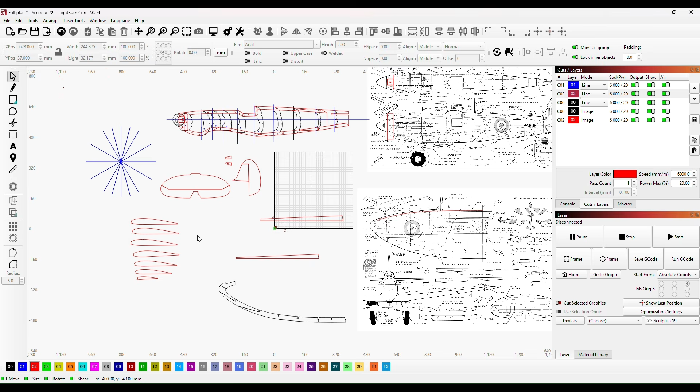So let's get going. To finish everything off, we've got our wing ribs and our wing spars. What we know is this is just the outline of the rib. They need to be cut so that they can fit either side of the spars. Also, with the ones outside of the dihedral area where we've got our plywood strengtheners, I'll notch those. I think I'll notch the spars and notch the ribs rather than cut them into sections.

But the first thing we need to do is position these ribs back on our leading edge that we've got here. I'll press the full stop and that turns us around 90 degrees. I'll bring that one up. Now, where I want this, I want the inside of the bird's mouth to be right on this center line here, but also the bottom of the bird's mouth needs to be level with this leading edge. So I'll close in on that a little by pressing Control and Shift and then using our arrow keys to move us around, and I think that's about the right place.

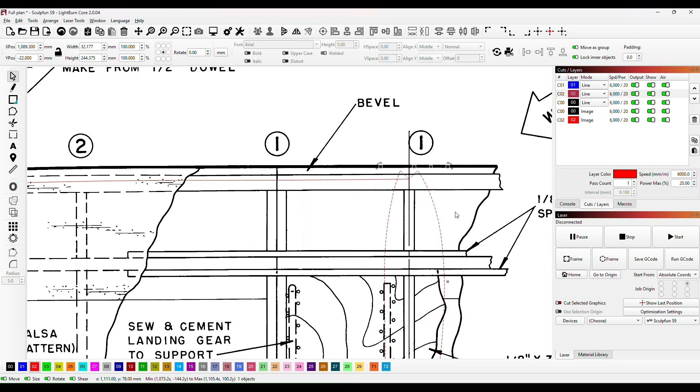Now if I maybe take the last one as well and bring that over, I'll put that into position so that the bird's mouth is just on the leading edge and level with the center of this rib on the plan here, and that looks around about perfect there.

Okay, so what we can do with this now is we can adjust the size of these spars, because remember we copied these straight off the plan, but the original plan has a 1/8 balsa wood cover on everything including the wings, because this was a control line model originally and we're converting that to radio control. So what we need to do is just alter the size of these slightly.

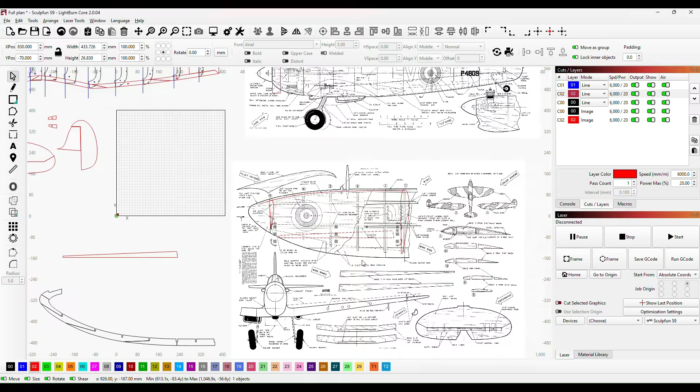So if I just bring that round and then bring the top of that to here, you can see, and I'll just alter the angle of this as well so that we're more or less parallel. You can see that this spar is nowhere near as big or as wide as the rib that it's going to support.

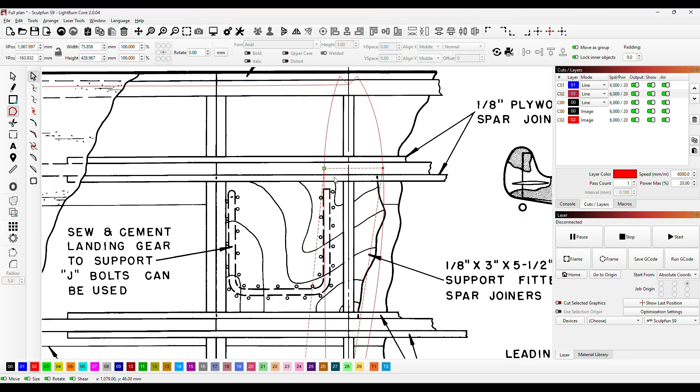So what we'll do is we'll go to nodes, and all I'm going to do is move this node to the center there and move that node to the center there, snap those into place. I now know that the thick end of this spar is going to be the right size for this rib.

So if I then come off there, press my full stop again, flip that round and bring it across to the smallest rib, and then what I can do here...

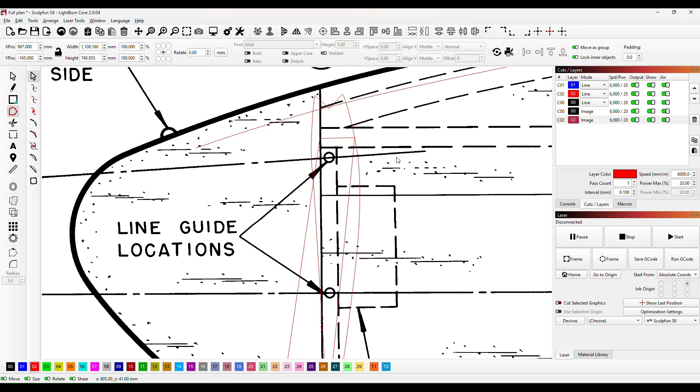is I can go back to nodes. Now I want to be in the center of this - this is the spar. Go back to nodes and I'll just bring that to the center there and bring that to the center there, and I know that spar will be exactly the right size because it'll taper down, as do all of the ribs.

It'll be exactly the right size for that leading spar there, and it will match all of our ribs. So if I just take that out of the way, then what I can do is get the smaller spar.

Just get that level as well. I can bring that in and do exactly the same at the other end. So I'll just drop that down until this is parallel first. Now if I drop that down until it's in the center of this spar here, just like that, and then take it to the center of the rib.

All I need to do is go to nodes and just widen that out a little bit. So come off nodes, flip it round, and then take it to the other end.

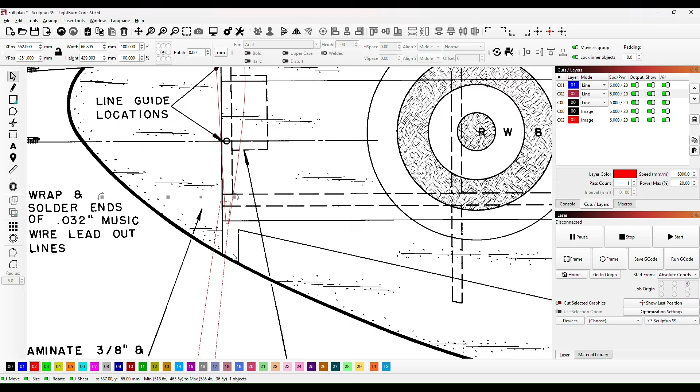What I'm finding here is, if I get to the center of that spar, we're actually not a million miles away. We're not very straight there, to be fair. But I think what we'll do is we'll just bring that in. We'll bring that in, and now I know that our spars are exactly the right size.

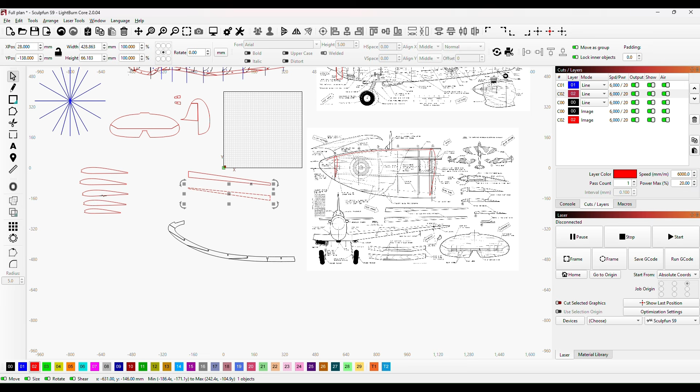So that was the first thing that I wanted to do. Next, I want to arrange the remaining ribs out. I won't put these two on, because these are both identical to rib number 1 there. So I'll just bring rib number 2 and put that in place.

Let's bring that over. Make sure that it's right in the center of this rib here, and I want the bottom of the bird's mouth to be just on our leading edge, our little simulated leading edge, the red line there. There we go, and that is absolutely perfect.

So if I bring over number 3 and do exactly the same, and then number 4, exactly the same. I'll just line those up now. There, perfect. And there we go, perfect with that as well.

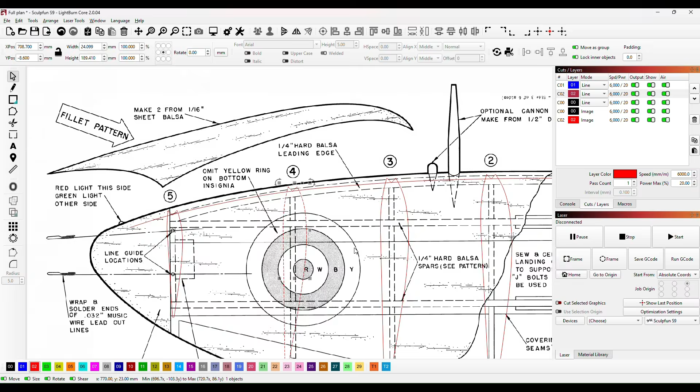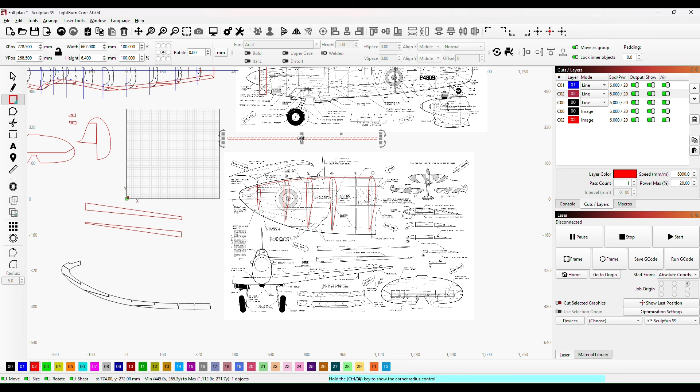Now what I'm going to do is make a rectangle, and I'm going to make this the length of the wing. Now the balsa we're going to use is 6.4 millimeters wide, so if I make the height of this 6.4 millimeters, what I can do is bring that down now and put that exactly where that spar is going to be.

Now what we notice here is that the wing's orientation on the plan isn't quite level, because we're absolutely bang on the middle at this end of the spar, but when we come to this end we've drifted, so we're going to have to just adjust this slightly, just like that, and then if we drop that down, there we go. I think we are very, very close there.

So what I'm going to do is copy that, and then paste another one down here for this bottom spar. The reason I've done that is because I'm assuming that this bottom spar is going to be at the same angle. I think that's very, very close.

Okay, so what we've got now is the two spars in place, and all of our ribs in place. So if I press Control and select each of these one at a time, I'll take the leading edge with us as well, I think. Now if I bring those over.

We're now in a position to start cutting the ribs, because we've got our spars in place, so we can actually cut this rib now into sections, and we will know that it will fit around the spars.

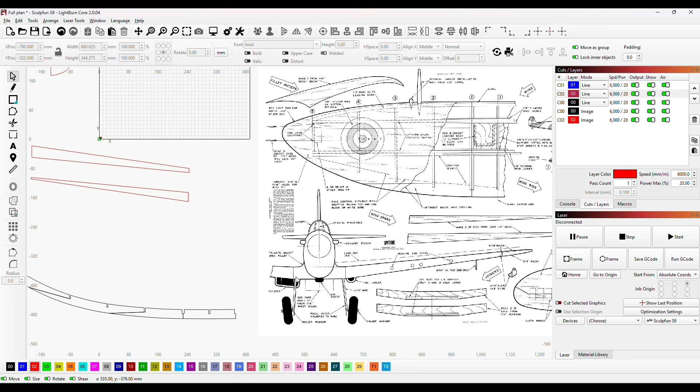Now the one thing that we do know is that at this end we've got our strengthening piece here, the ply, and that's going to go through all of the number one formers. It goes through this number one former right at the centre, and then through these two number one formers where the spar begins, because this is the central part of the wing, and our spar will start here and then come up.

Okay, so let's just have a look at what we need to do with those. The first thing that springs to mind is if we just look at the structure of this wing, this is quite a big wing. If we were to get our measuring tool and look at where the wingtip's going to be, which will be about here, and then look to where the centre will be, which is just where that rib is there.

If we just look at how far that is, it's 560, which means this wing is going to be over 1 metre wingspan.

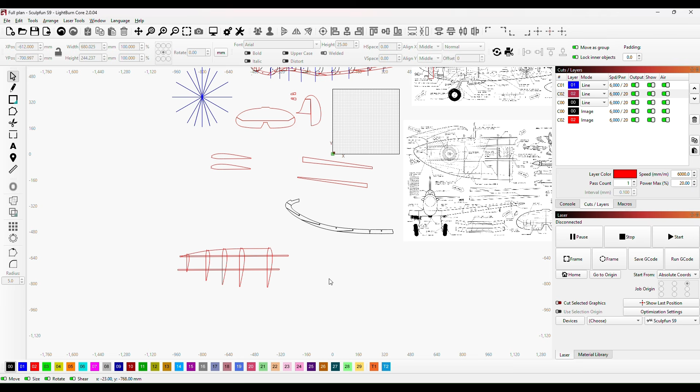So when I look at this, I notice that we haven't got many ribs in there, and you can understand that because the original aeroplane, being control line, was covered in 1/8 sheet balsa, which we're not going to do. So I think what we need to do is, in between all of these ribs on the main plan, insert or create a new rib, because we're going to be covered with covering film.

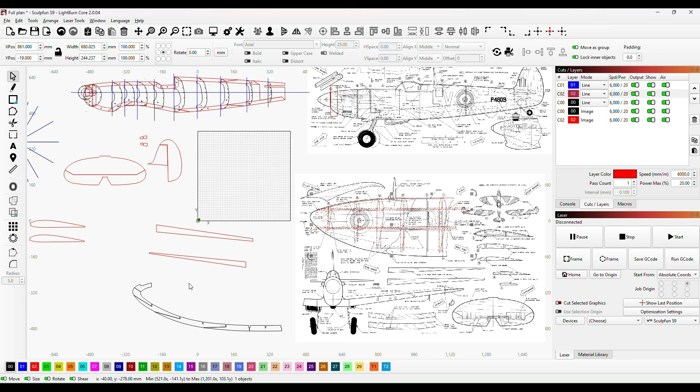With that in mind, I'm going to group this so I can manoeuvre it about without it losing its orientation, and bring that across and place it back on. What we're going to do now is make new ribs and put them in between these ribs, then bring our trailing edge over as one piece and connect that up, then cut new slots in for the new ribs. I think we'll be in a much better position to make a sturdy, strong wing with our Oratex covering for the conversion to radio control.

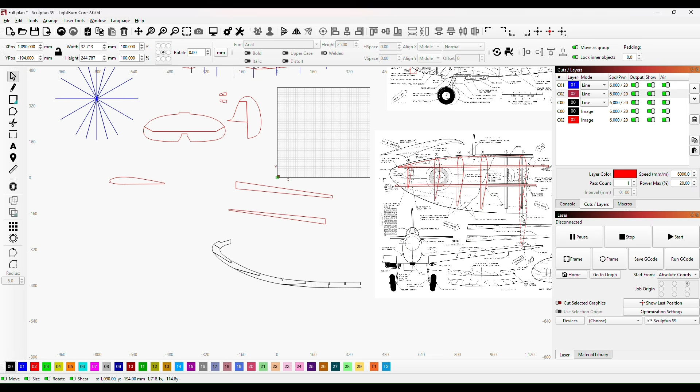So I'll take one of these other ribs from over here, rotate that, bring it over and orientate it with this end rib to make sure that it is perfectly upright.

If I just move across, I think we'll find that's about where we want it to be. So this is the central rib, which will be right in the centre of the fuselage, and this will all be covered with 1/16 sheet, because that's the bit that's going to fasten to the bottom of the aircraft. But then from this rib here, we're then only going to be covered with Oratex covering.

So from this rib here, I think we need to start making our new ribs to come in between. All I'm going to do is make sure that we've got the tips of our current ribs, and make sure I've got a line joining those so I know how long the new ribs have to be. The way I'll do that is...

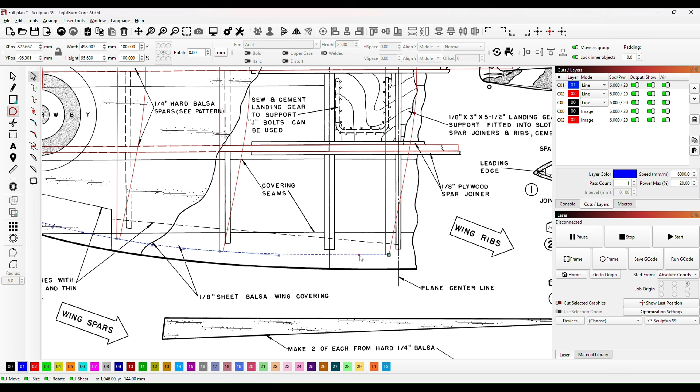We'll probably do this in blue, I think. All I'm going to do is go from that to there, to there, to there, and to there. Then if I go to nodes and just convert those to smooth curve nodes, that gives us a line to work to now, to know how long our new ribs that we're creating in between have to be.

So what I want to do now is, between this rib and this rib—and I'm using the ribs on the plan, not the proper ribs that we've made—all I want to do is measure that distance. So that distance from the edge of that rib to the edge of that rib is 102 millimeters. So I want to come 51 millimeters from the edge of this rib and place another rib there.

So all I'm going to do is make a rectangle, and that rectangle will be 51 millimeters wide. Then when I place that right on the edge of that rib there, you can see that edge there. I know that the edge of our new rib will need to be right there on the edge of that.

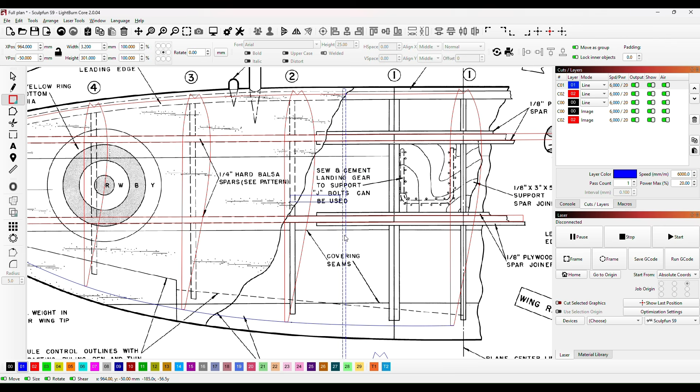So all I'm going to do is make a new rectangle, and I'm going to make that 3.2 millimeters wide, and I can now bring that and place it just on the edge of that shape there. I know that that new shape there is in the right place for our new rib.

Okay, so if I just copy, I'll put another one there for now, another one there, and another one there. But I do need to measure each of these, because it looks to me like each one's a little wider than the one before, the gaps between the original ribs. So all I'll do is measure.

So that's that rib. I'll measure between this rib here, or the bottom of that rib, or the edge of that rib, to this one, and that is 103 millimeters. So I think I'm quite comfortable with that will be 51.5 or 51 3/4.

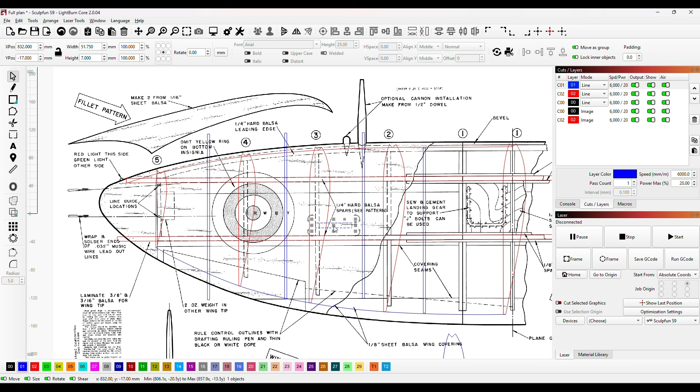So if I just grab this shape and I make that 51.75, 3/4 of a millimeter difference, and I can bring that across and place that exactly on that line there, measured. Then I can bring our next rib across and just snap it onto the end of that there.

There you go. And I know now that that is in exactly the right place, so if I just bring that up to there, drop the top down to where the bird's mouth has to go to.

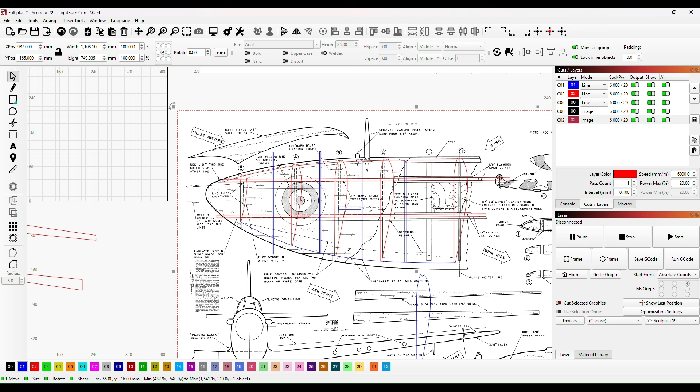I can then do the same process again on these last two ribs. I'll quickly do that and show you what that looks like with all our new ribs placed in the middle there, with the blue ones. I'll show you that in just one second.

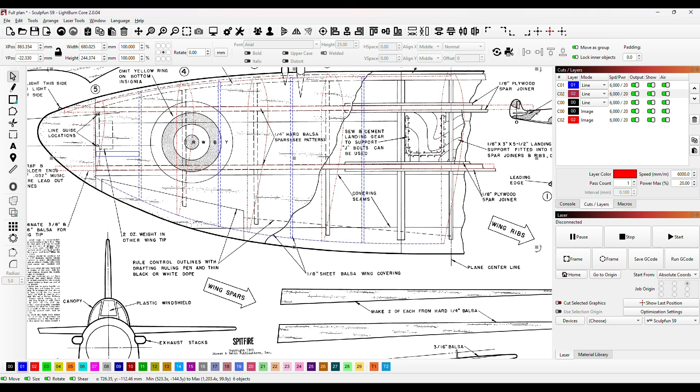Okay, so that's them all placed. Now what I'm going to do is collect our original piece, which was grouped, remember. I'm going to then also press Control, and pick up each of our new shapes for where our new ribs are going to be, and this trailing edge, and then bring the lot

across, and I've now got our new rib there. But what I'll do - I'll worry about that rib in just a minute, because the first thing that I need to do... In fact, no, I can make those ribs now.

So one rib will go right on the center of this one. So the bird's mouth will go right into the center - that's where the bird's mouth will sit. And then if I just bring this across now, so that I can line this bottom up with the bottom of the rib, we'll be able to set the height properly.

So all I need to do now is bring that rib up, and that is our number, and we'll call that 1A, because this is going to be rib number 1, and there'll be 2 number 1 ribs in the middle here where the dihedral is.

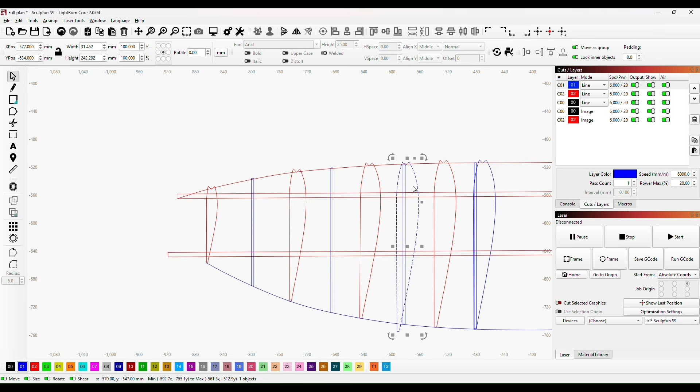So I'll just make a copy of that - a control C, control V - and then what I need to do is line up the bird's mouth with the red line right in the center of where the rib is going to be. Just there. And then what I'm going to do with this one is to bring it into shape, into the right size. I've just got to bring it across so it's level with the edge of that rib.

Now we're going to use the corner to bring this in now, because we want it to shrink proportionally. We want it to get thinner as well as shorter. Okay, so we'll then control copy that and produce another one here.

Okay, and we'll just keep doing that now until we've got all our ribs made up, and what that will do is give us more ribs for the wing, so that we've got a little bit more structure there, a little bit more substance. I'll show you what that looks like in just a minute. So that's all our ribs done.

What we need to do now is cut the notches into our trailing edge. So I've just temporarily grouped our trailing edge, and what I'm going to do is drop that straight onto the plan.

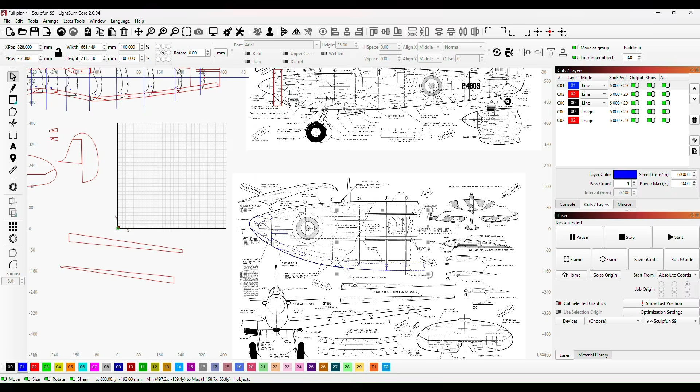And then what I'm going to do now is grab our line for where the slots are going to be in the trailing edge, and I'm also going to grab each of our ribs that will form part of our new plan shape. And if I just group those temporarily again, what I can do is bring those over and we can sit those on. All I'm doing is positioning them onto the trailing edge at the moment, so they would sit just like that.

Okay, now I need to drop this down so that the trailing edge is level with our original rib slots, and we can see that the front edge is now in the right place, because this edge here will be touching the rib.

So with those all lined up, what I need to do is press Control and make sure I've got both parts - the trailing edge, which is grouped, and all of the new ribs, which are grouped. I can bring those across, and now I'm in a position to ungroup those - ungroup that part, and now ungroup this part.

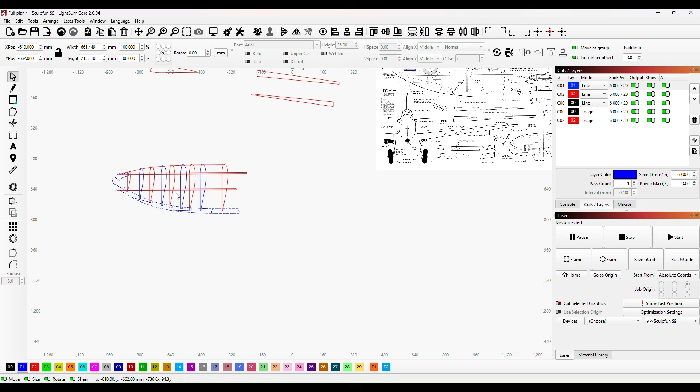I think that will give us a much stronger, firmer, and better rib wing to cover for our Oracover. Bear in mind there's another two ribs to go in here where the dihedral is, but they're copies of rib number one here.

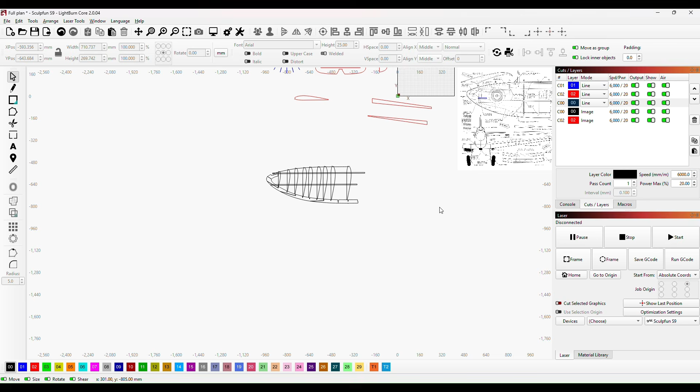Okay, so I think we can now change those and start thinking about making those into proper ribs ready to cut out. So that's all our ribs done.

What we need to do now is cut the notches into our trailing edge. So I've just temporarily grouped our trailing edge, and I'm going to drop that straight onto the plan. I'll just change the colour there, I'll change that to blue, and we'll move that into place.

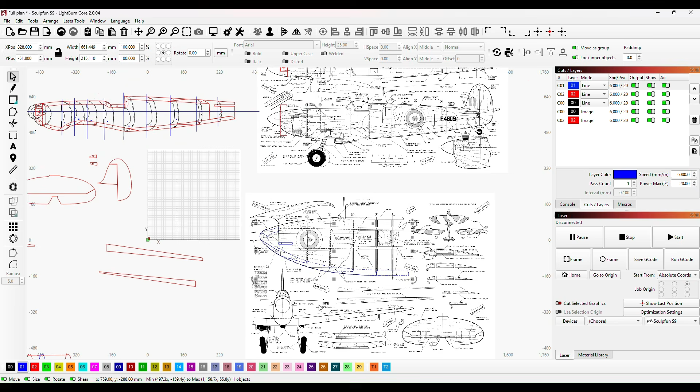That's just in place. Then what I'm going to do now is grab our line for where the slots are going in the trailing edge, and also grab each of our ribs that will form part of our new plan shape. If I just group those temporarily again, I can bring those over and sit those on - positioning them onto the trailing edge at the moment, so they would sit just like that.

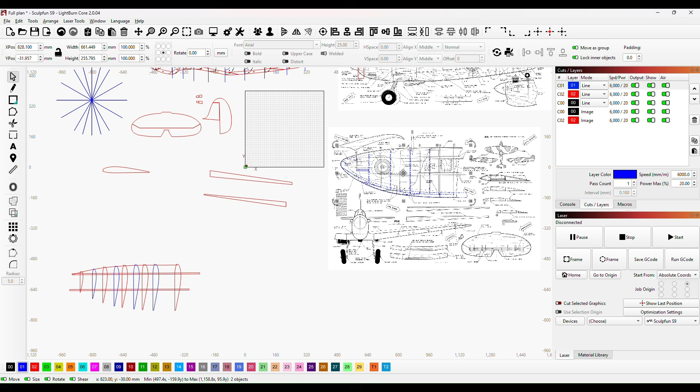So with those all lined up, what I need to do then is press Control and make sure I've got both parts - the trailing edge, which is grouped, and all of the new ribs, which are grouped. I can bring those across, and now I'm in a position to ungroup those - ungroup that part, and now ungroup this part.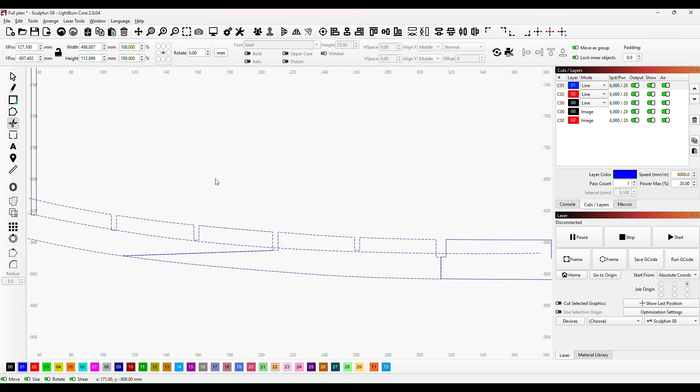What I can do now is use our snipping tool, and I can just cut away all of the bits that we don't want, and what I'll be left with is new slots in our trailing edge that will allow us to put our new ribs straight into that trailing edge.

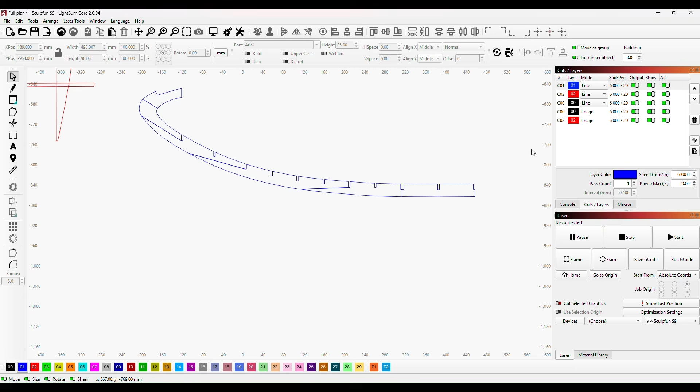So having done that, what we can do now is remove this guideline, because that was just a guide. Delete. So we've now got our new trailing edge, which will now accommodate all of our new ribs as well.

Okay, so I think we can now change those and start thinking about making those into ribs ready to cut out.

So the next thing to look at, I think, is we need to produce these shapes for the dihedral. Now these are going to be made out of 3mm ply, and you can see that this one at the front is slightly deeper than that one - so this is the front of the wing and that's the back of the wing. So all I'm going to do to produce these is use the line tool and very quickly go around the outside, then we'll tidy that up with nodes in just a second.

Now these also have a slot in them, as you can see just here - that slot is for another piece of ply to go in, which will hold the undercarriage. The undercarriage will then be fastened onto that. So what I'll do is produce both of these plywood shapes here, and then also produce a piece of ply to go across inside, and I will put small holes in that so that we can bind the wire undercarriage to the piece of ply that goes in between.

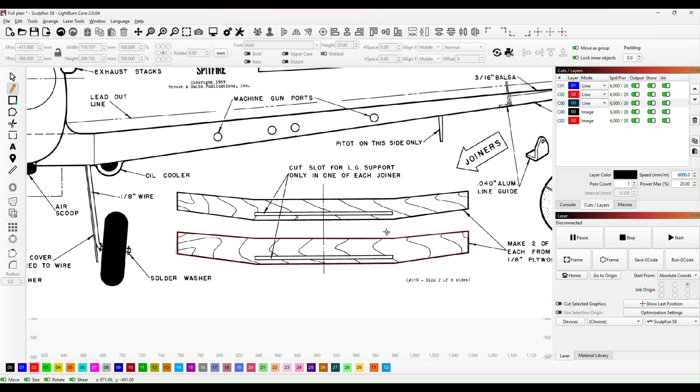I'll show you how that looks in just a minute, but let's finish off these two shapes first. You can see I've just roughly put those in place. We'll go to nodes, and all I'm going to do with each of these is keep them as corner nodes because we want nice sharp edges.

Just get that right onto the corner there, and the same with this one. You can't quite see the node there, just the red dotted line, but if you scoop a shape around it, you'll pick up that node, and once you've got it, you can move it right into place on the outside edge of that shape.

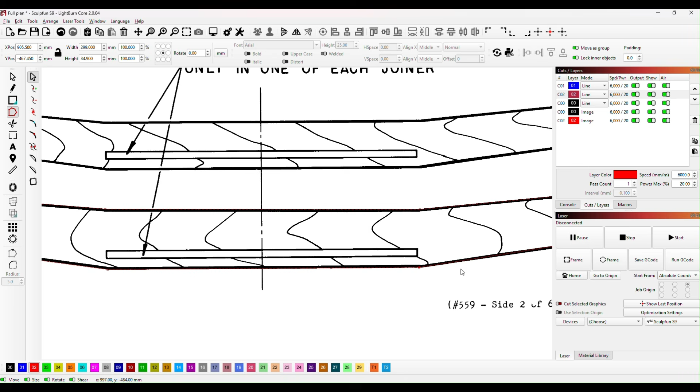So if we move along, I'll be able to pick this one up and do exactly the same with that. What I'm going to do with these in a minute is copy them and flip one, just to make sure they are perfectly symmetrical. I'll show you what I mean in just a second when we do that.

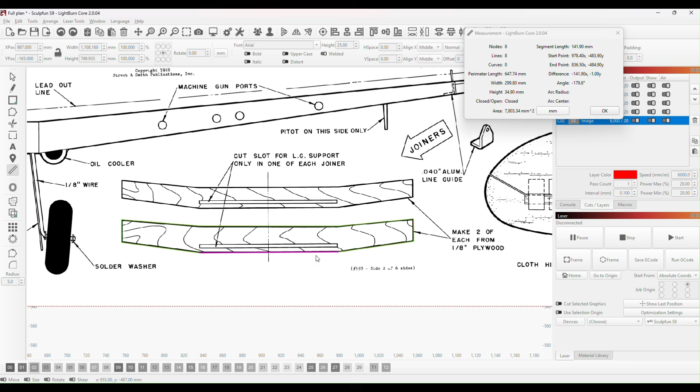So that's the first one, and what we'll do is put these slots in just a minute. If we measure that, the slot is about 5.15 millimeters from the bottom, so we'll make that around 5 millimeters, and we'll work out what to do with that shortly. So that's one shape done.

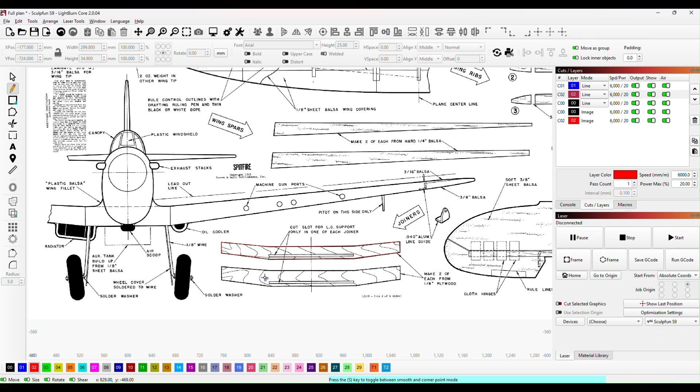Let's bring that across, and I'll just put it under there. Let's quickly do the other shape, and then we can think about finishing those off. Oops, that was miles out. So I'll just correct this one first.

We'll go to nodes, and there you go, I'll just bring that node down. I missed that point by a mile. Never mind, let's just...

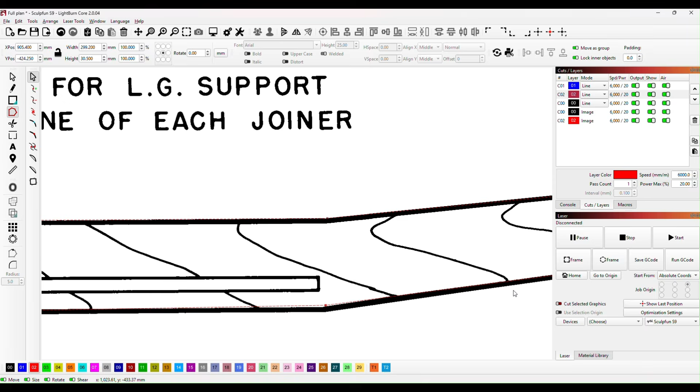I just want that dotted line to follow the outside edge of our black line there, because the thing to bear in mind is that when we use the laser, it will actually cut out that line as well, albeit a very, very fine cut. Okay, so that's our two shapes.

Let's bring this one back over to where the other is. Let's just check these for symmetry. If I Control C to copy, then Control V to paste, I can flip that one and check that they are symmetrical. We can see the orientation on the plan isn't quite level, but that looks good to me. I'm happy with the symmetry there.

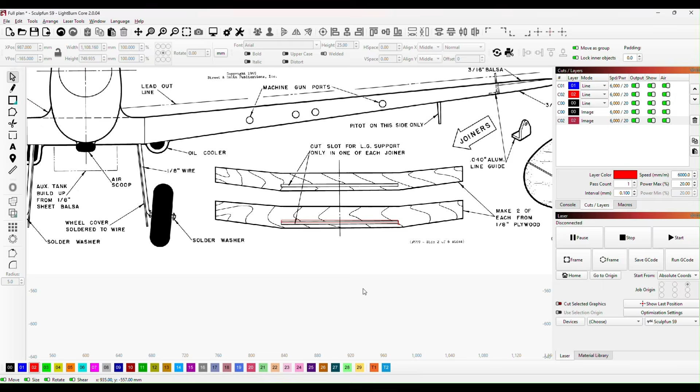Next, we want to produce our slot for our platform to hold the wheels. So we'll create a rectangle and make it the same length as that. Our plywood is going to be 3mm, so all we do is take that shape, make it 3mm high, just like that, and we know that slot will be the perfect size when we drop it into our formers.

All I want to do with this is, if I grab both of those, I can center them just by pressing this button here. The other way to center is if you take hold of this, can you see it snap to the center there? That's snapped to exactly the center of this shape. So if I copy with Control V and put the next one there, that snaps to the center too.

Okay, so all we need to do then is lower those down until they are 5mm from the bottom. The way I'll do that is I'll create a small block and make that 5mm high. Then I drop that into the center there, and if I zoom in, I can just drag that down and snap it to the line below.

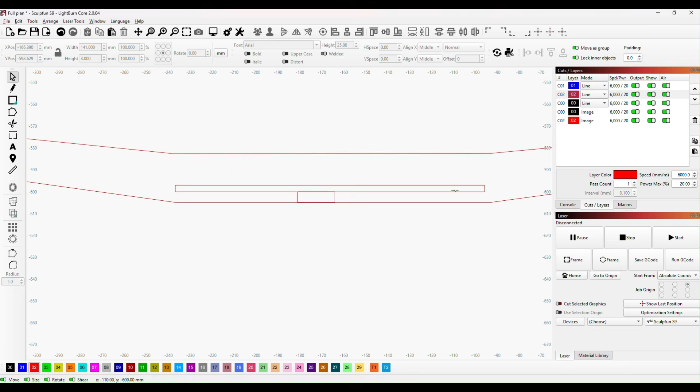Then if I bring this down using our keys so that it stays in the center, I can set that at exactly 5mm. So I now know that's 5mm off the bottom of that shape, and it's right in the center. I'll move my little measure down again, zoom in, grab that bottom line and bring it down till it snaps into place. Using Control, I'll drop down 1mm at a time until I get close, then Control and Shift to move 1/10 of a millimeter at a time until I'm 5mm off the bottom there.

Okay, so that's our two shapes made. Just remove that 5mm block. I think the next thing to do would be to group these - just group that one and then group this one.

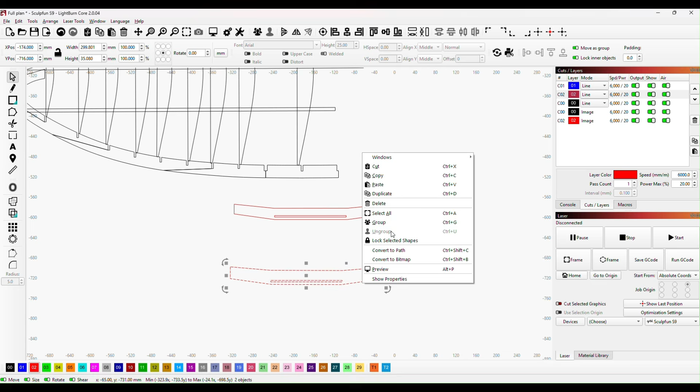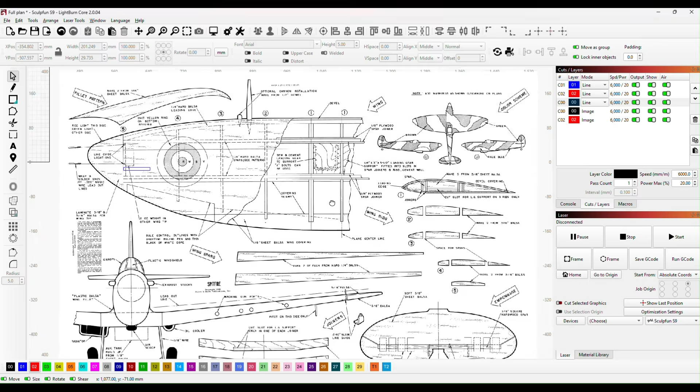Next, I'll make the piece that goes in between. A couple of things to note: for each of these dihedral shapes, we've got 2 per spar. If you come across and have a look here, you can see the spar going through the center, and then we've got the 3mm plywood on - one at the front and one at the back. Then on the second spar you've got one at the front and one at the back.

So it's only one of these that's got the slot in it to take the landing gear platform. I've made 2 of those for each, one with a slot and one without, and I've labelled those up - D1 and D1A, D2 and D2A.

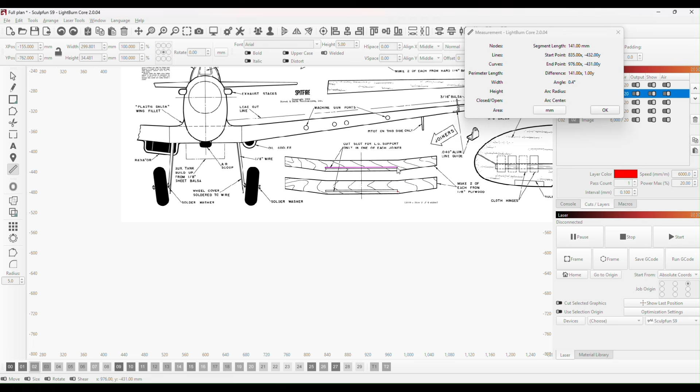Now the other thing to note is, on this plan here, if we was to measure the slot for the undercarriage platform, that is 141mm. But when we check the distance, based on this wing plan here, when we measure between the 2 ribs - there'll be a rib in here and one in there - we find it is 136, which means the slot would be bigger than the ribs.

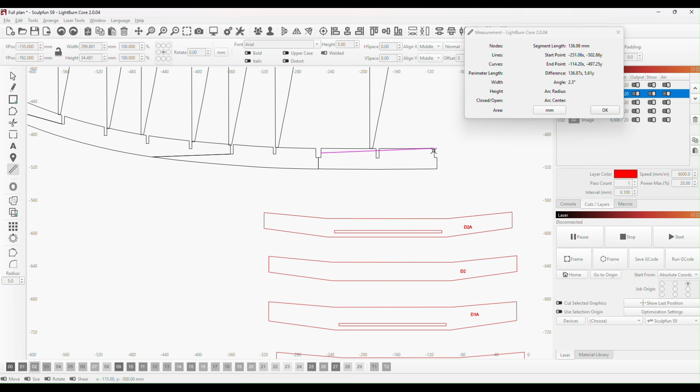There's no need for it to go through the ribs. We want the slot to stay inside of this rib and this rib, not to extend beyond for no good reason. So what we've done is reduce these in size to 129mm, which means they will be 3.5 millimeters inside of each of these ribs.

So I can make the platform a nice rectangular shape with a little tongue sticking out the end, which will fit into these slots, and it needs to be as wide as this gap here between the two ribs. I'll set that up so we can get that exactly the same size, so the platform will actually contact the ribs either side.

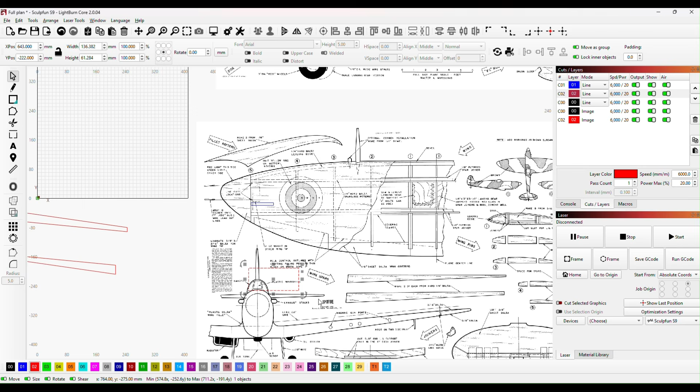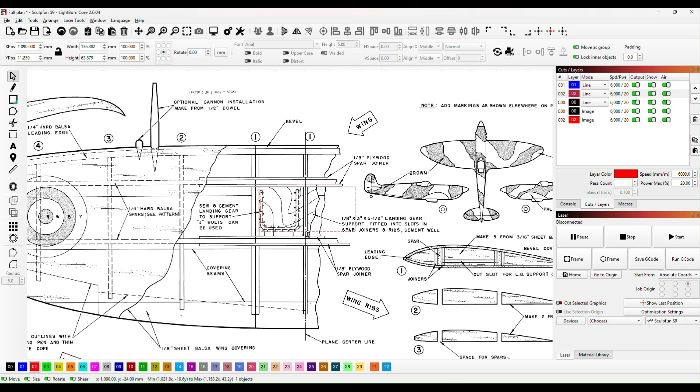Now, as for the size of the platform, what we'll do is whip this straight across to our wing plan, and that platform is going to sit between this pair of ribs and the pair of ribs on the other wing. The height of it will be between this strengthener and this bottom strengthener - that's how big the platform wants to be.

If we bring that back to our wing, you can see there is now a small gap either side, and that's where our former will go. So if we bring this down until it snaps onto that line, we would want this gap to be 6 millimeters.

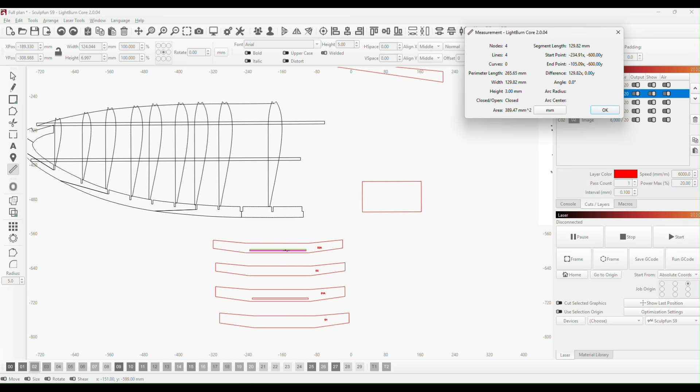Next what I want to do is produce a 129 millimeter rectangle, 129 millimeters, and I'll make it 3 high. What I'll do is make sure we're perfectly square here - if I hover above that, press A, there we go. And then if I bring this down so that these edges just line up, there we go.

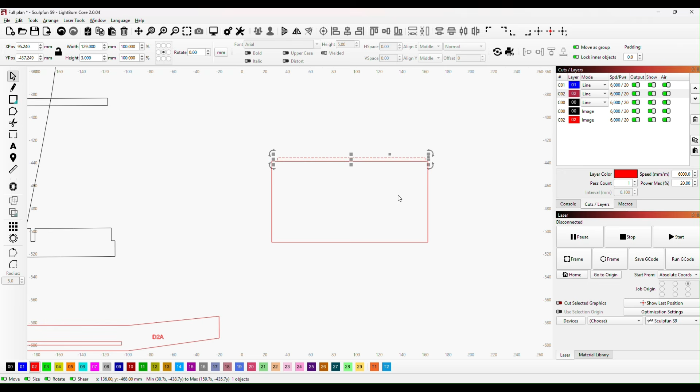Then I want to Control C, Control V, make another copy of that, and bring this one up until it just touches. Then all I need to do is press center for all of those, and they're now centered. Now if I just select, without moving anything, this bottom rectangle and stretch it in, so I haven't moved the outside part, and click on this one and stretch it in without moving the outside part.

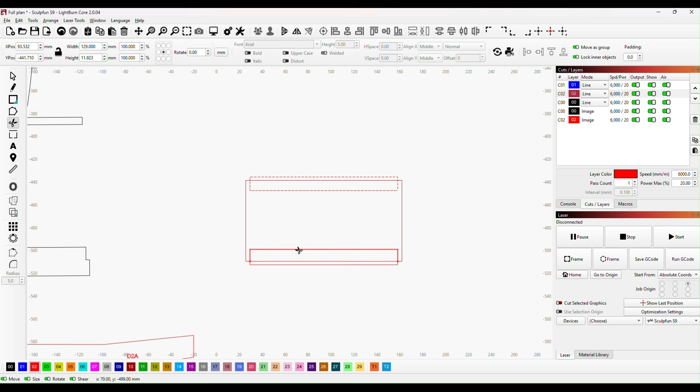What I can do is get my snipping tool and come away and snip away the bits that we don't want, and what I've now got is a platform that will fit neatly in between these two dihedral formers, and it will just plug nicely into that slot, and obviously nicely into this slot when the wing is formed. So that's going to be our platform for our undercarriage.

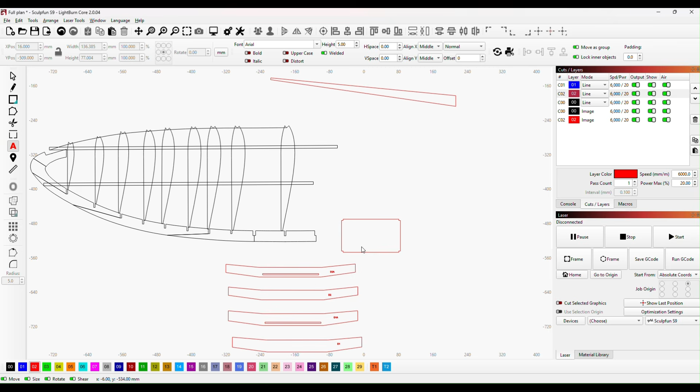Let's just label that up - UC.

Move that to somewhere where it's not going to get in the way of our slots for our undercarriage to be wired on. Okay, and so that is our support for the undercarriage shaped out.

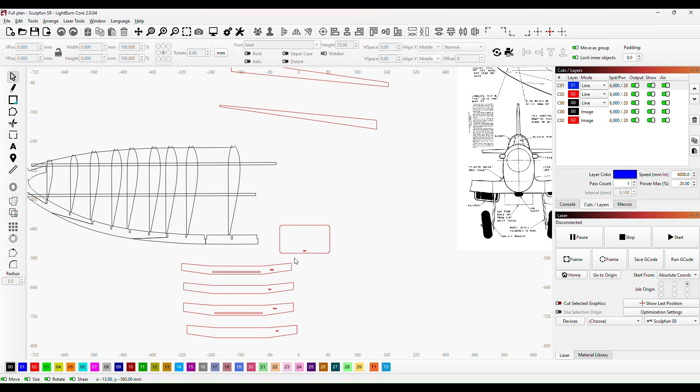What I'll do is put small holes in that so we can bind the wire on, and I'll show you how I do that in just a minute. So the wire for the undercarriage is going to come in on the underside of the wing, and then it's going to be bound in that shape around this piece of ply, which will be sat in the centre of the wing and underneath.

If I start off with a rectangle, and I just make that 5 millimeters wide, I can use this as a frame now to arrange our small holes on.

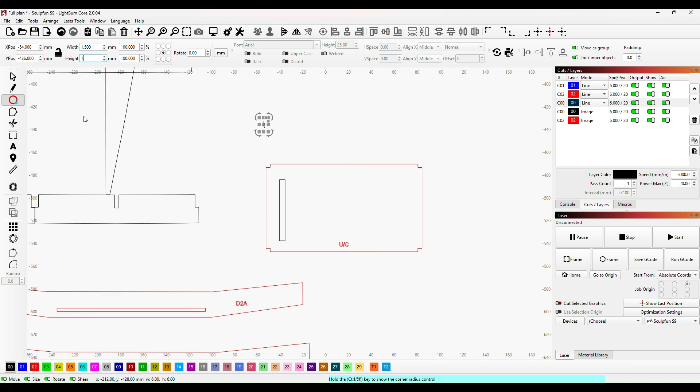So if I now make a small circle, and I want that to be 1.5 millimeters by 1.5 millimeters, just like that. Now what I can do with this is, if I bring it down and try to place it on that line, it will snap to the center of that line.

So if I control-copy and then make a number of these, I can arrange them just by snapping them into place. And if I do maybe 4 at a time, put another 4 there. That one needs to go up just a fraction. And then just make a couple more.

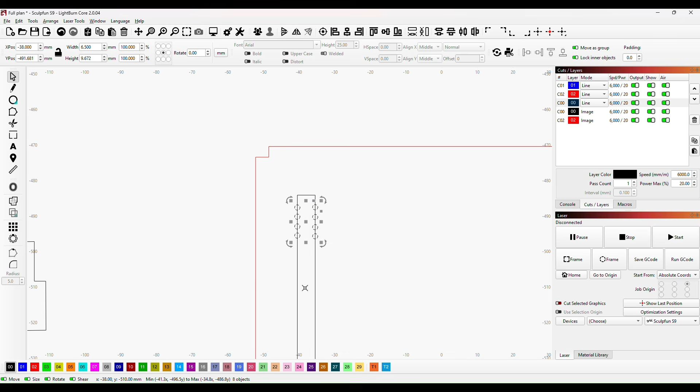There we go. Then what I can do is group those and copy, control-copy, and come down and control-V and control-V, and I think those 3 little banks of holes should be just about enough for us to bind our wire on.

Do I need another set of those? Maybe I do.

Now if I copy the whole thing, control copy, I can then put another one over on this side, just like that.

And if I group all of those, I can go to center again, I can then select center again, and I now know that they are properly centered. So if I just ungroup those...

What I can do is make a copy of this. I'll just group those temporarily, make a copy, and then I can maybe get 2 of those, and then if I press the full stop, they'll turn at right angles.

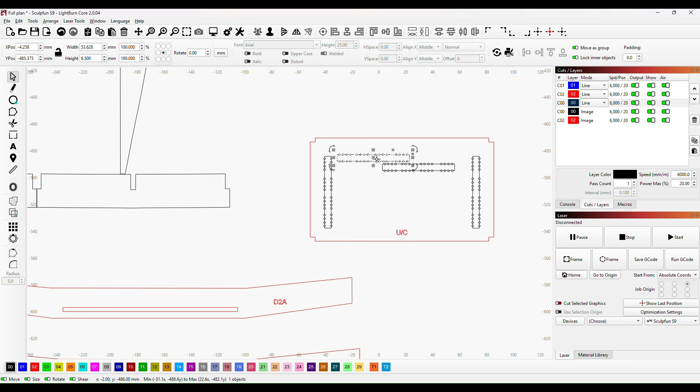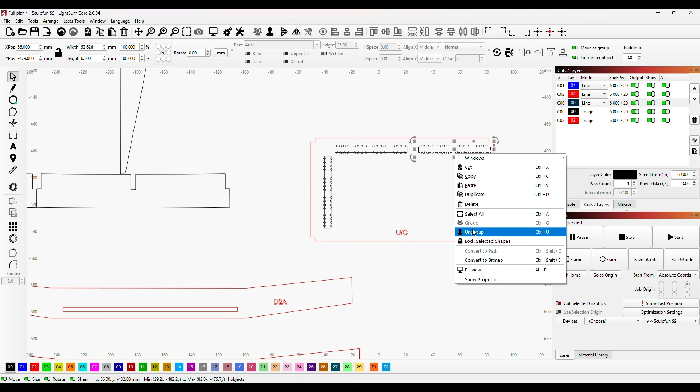And then what I can do is place those just there. And then with this one, if I ungroup, I can just remove this little group here, and maybe just bring those over. And I think what we've got now is a nice...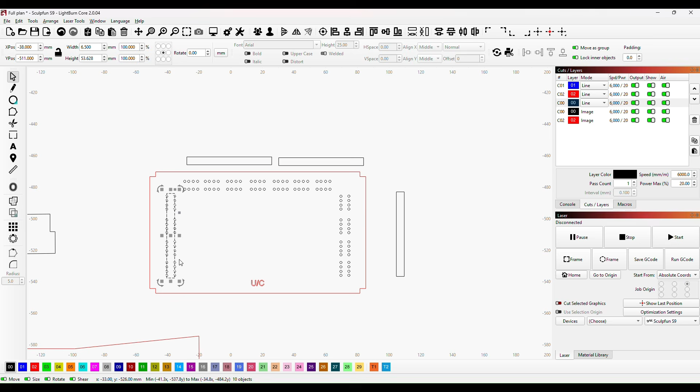And what we can do is just remove these frames that we built our shape around. We can delete those, and then what we've got is our platform that we can put our undercarriage on, or bind our undercarriage to, and when we cut this out, all those holes will be there and we'll be able to lay the undercarriage into that and bind it to the plywood. Change those to the cutting layer and change that to our engraving layer.

And now if I group again, that component is now complete. Okay, so that's how we're going to bind our undercarriage to the aircraft.

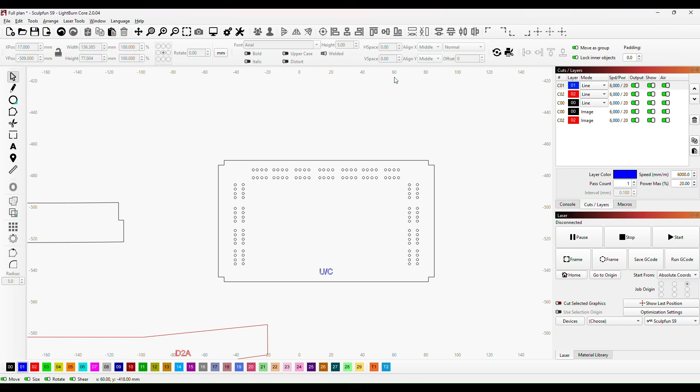So the next thing I'm going to do is lay out the components that we've got here, ready to send across to the laser. I'll show you how I do that.

There is still more work to do on the wing. We need to design in the ailerons, so I'm going to leave that for now. What I'm going to do is concentrate now on all of the formers for the fuselage and for the outline of the keel.

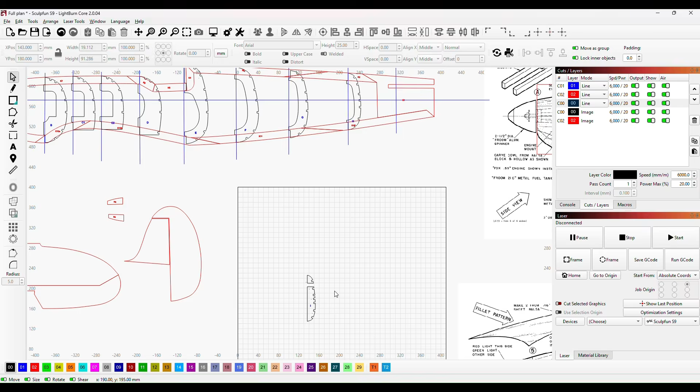So looking at the formers first, the majority of the formers are going to be balsa. So this one at the back here, this is former I, so we can put that straight onto our cutting sheet. Now one of the things that we should do is get these nice and level.

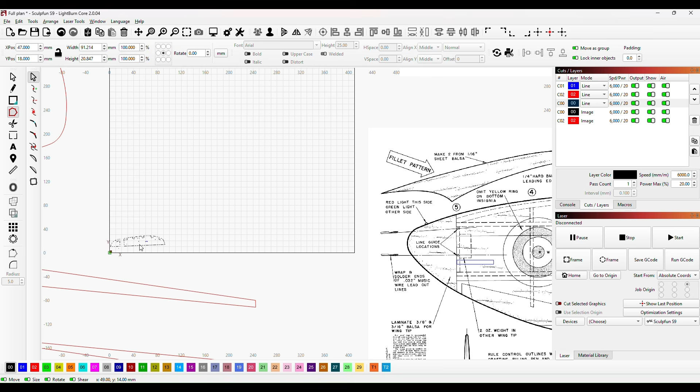So if I just go to nodes, I can hover over this bottom edge here and press A, and that will level that up nicely. So put that into place. Just like that. Now that is I.

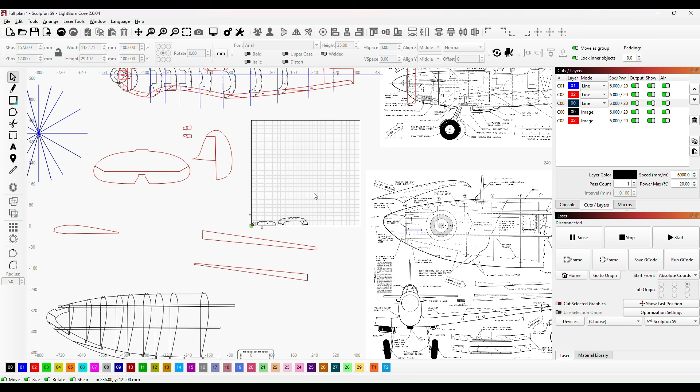And so if we take the next one, which is H, we can start positioning these. Now I'm laying these down like this because the grain of the balsa wood will then be running along, so it'll be running from top to bottom when we look at the fuselage, and that's the strongest way I think for us to do this.

Okay, what I'll do is lay all these out on the cutting sheet, and I'll show you what they all look like in just a minute. So these are the formers that will be made from balsa wood, and you can see we've got the nose there as well, which will be around the motor.

So the motor, only the propeller will protrude through this bit. But these formers here, I'm going to make from 3mm ply. So I've got the motor mount, which will be made from ply, and these three formers.

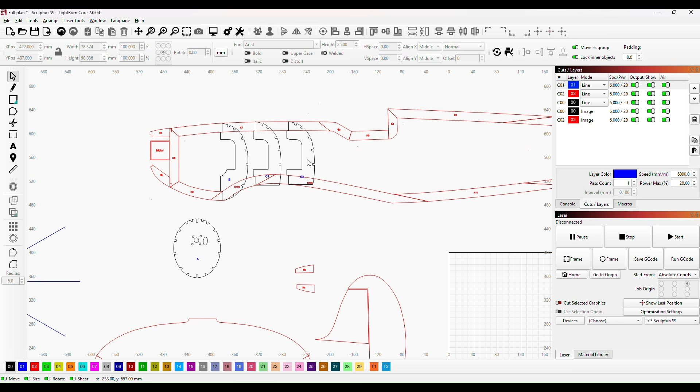If you have a look at these, I've put a flat on the bottom of each of these, and that flat lines up. If we were to draw a horizontal line through those, they would be lined up. The reason for those is I'm going to put a platform in there, and that platform will support the battery and the other things, such as the receiver, etc. So that's the intention there for those.

I've got these formers for the nose. Now they are going to be made out of 1/8 balsa, and they will fit in here. So you can see that is 3.2mm, the width of that slot, and those formers will fit straight into there.

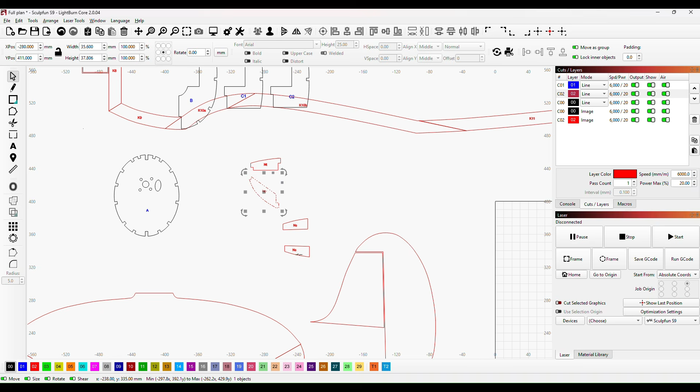So if I bring those out, they can go into our 1/8 sheet as well, along with these two side formers. So I'll bring all those across.

I'll convert them to our cutting layer, and then what I'll need to do with each of these is just ungroup so that I can convert the letters to our engraving layer. So I'll just quickly do that. There we go, just highlight each of these and convert them.

And then if I regroup each of those, what I can do is drop them into our sheet, onto the 1/8 sheet down here, and we'll probably be able to fill in some of the spaces left by the formers. I'll show you how we do that in just one second.

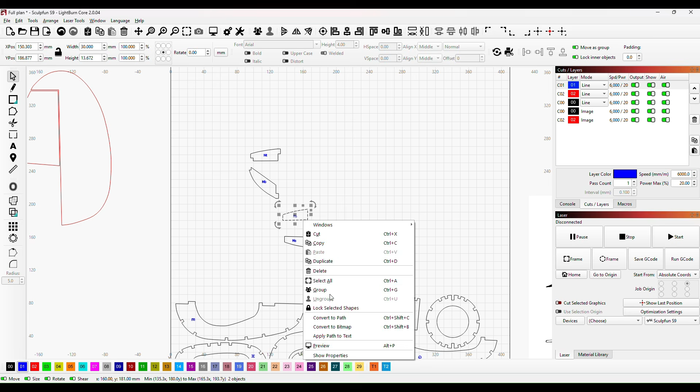Okay, so you can see they can, there you go, that one fits right in there, which saves us a little space. Some of these other formers will fit nicely into these spaces here. Just helps us to reduce our wastage.

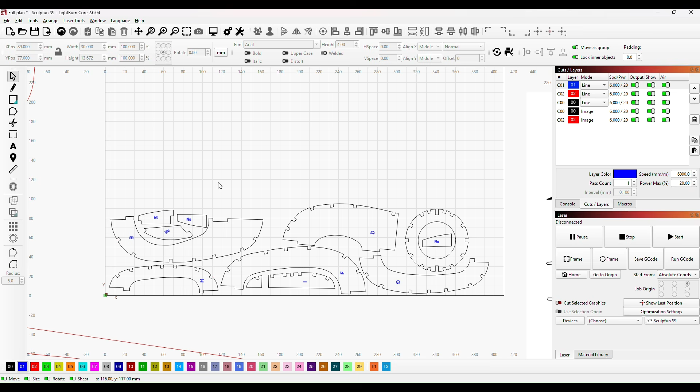There we go. Now bear in mind that our sheets are 100mm wide, so you can see that there's the 100mm line there. We can't cross that line with anything, otherwise it will end up cut out of two separate sheets. So I think that's our first piece of 1/8 balsa.

Now this up here, the keel, is going to be made from 6.4mm balsa, so that'll be a different sheet. So what I will do with these is, if I copy all of those just like that, Control C, and then come up here and press new. I just need to save what we've got. If I come up here and press new, I'll get a new sheet.

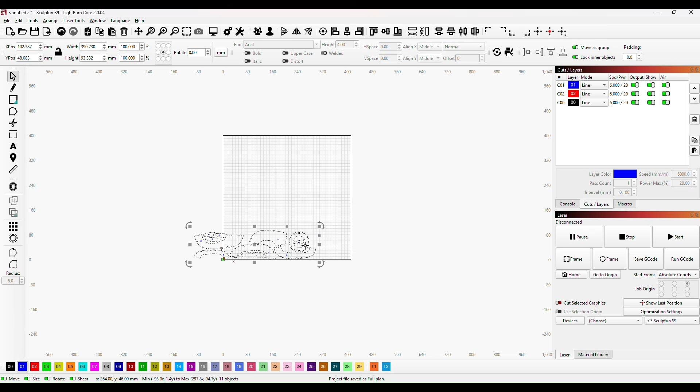I can then put those onto that new sheet, and I will call that - we'll do file, save as - and I'll put in 3.2mm balsa sheet 1, and I'll save that.

Okay, so if I now open our full plan, what I can do now is go to this sheet here and I can remove those from the full plan. So just delete. Okay, so all those formers have now gone and they're now on a 1/8 balsa sheet.

What I'll do now is the same thing with our keel, with all of these components, just making sure that I bring the lettering with them. So I'll bring each of these components down onto our sheet and I'll lay them out in the same way, and I'll show you how that looks in our next video.

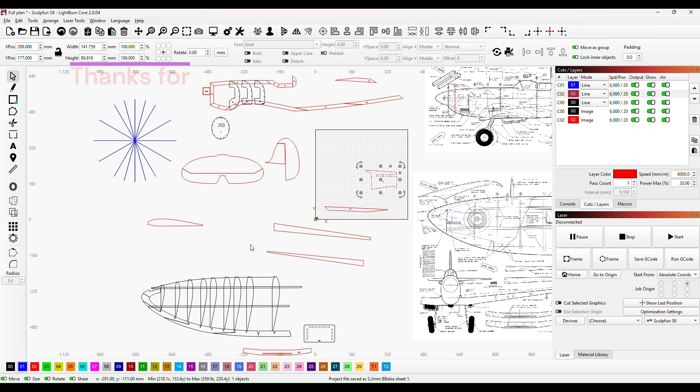Because what I'm going to do is stop now. I'm going to arrange everything onto the sheets and I'll show you what they look like, as I say, in the next video, and I will also in that video complete the wing, and then we'll be able to go to the laser and cut everything out.